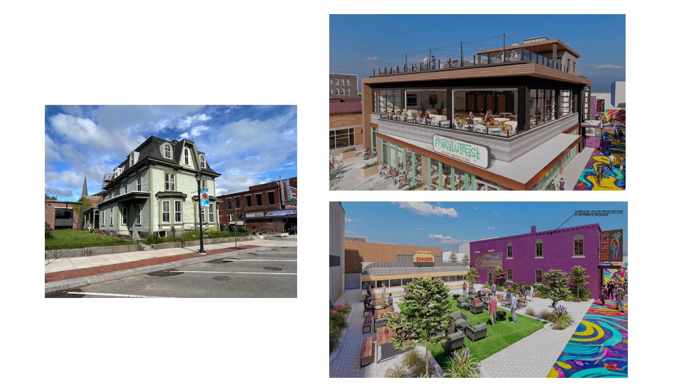Steve is desperate, if you have a piece of land, Steve will move that building for you. But that should be for the homeless, if nothing else. Find a lot, he'll move it. Again, I hope we don't all agree that it's 100% one way or the other.

Mark's remarkable building to re-energize Phoenix Hall. I mean, they're all nuanced.

So what do I think? I think that is kind of in the public trust. I really do. It's owned downtown Concord. I think individuals own pieces of it, but I think it comes with a responsibility. I mean, again, I think the owner has an outsized vote, but I think that

there is a public investment in the downtown, and I think it's different, and I think it requires more thinking through things more. What else do I think? I think that

if I had to editorialize, I hope that when we have these historical discussions, we don't just think about the brick and granite buildings. We are willing to think about buildings that we will recognize might be important in time. I mean, that was on the cover, the employment security building, on the cover of New Hampshire Architect. I don't think that exists anymore, right, Chris?

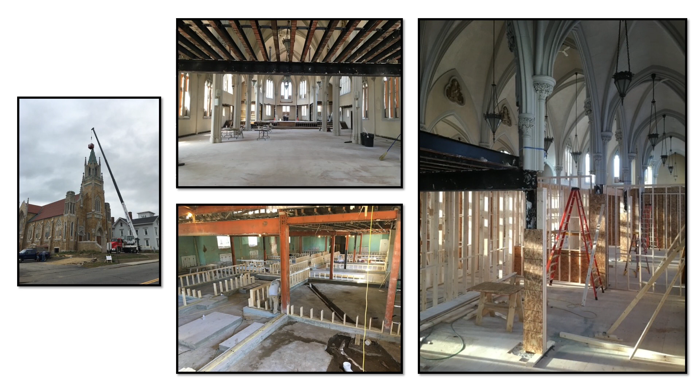But these things, as you turn the page to a new chapter, it's painful. That's the cross coming off the church. Certain elements are saved, a lot is lost.

But with a lot of investment, there is a new chapter. I'm always amazed how many people still think it's a church, which I take as the greatest compliment. There are 10 families that live there, and their friends and family members roll through and get to see these remarkable details. Hopefully it lasts more than 39 years, but this is just the next chapter.

John, in addition to doing every residential project I've been involved with, does a lot of other stuff. In Concord, probably the thing you know him best for is the Endicott furniture facade work, which is remarkable - my point about high quality, low quality, that's high quality. But if you're a Manchester person, John's done some remarkable stuff down there, including the Pandora Mill, now UNH Manchester. John designed the Foundry restaurant there, and this incredible space for DEKA and some of these biotech companies.

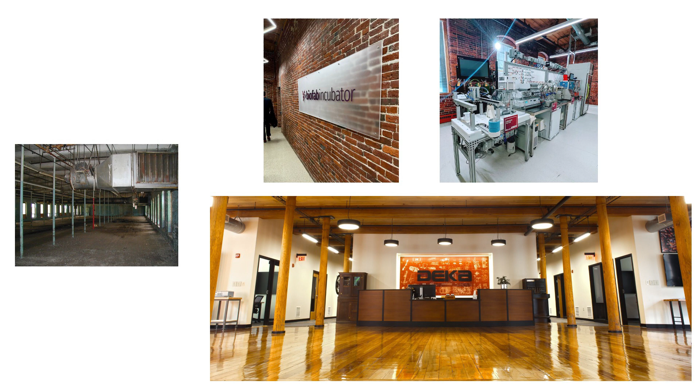What is that, the DOE? Yeah, it's an ARMI bio incubator space, so it's ARMI BioFab.

The gist of this stuff was to note that most of the work John just showed are all in mill buildings, all the old woolen mills, and they can house anything from restaurants to office buildings to clean rooms designing the future of bio manufacturing. People are down there inventing how to manufacture human organs. It's all in the shell of a building that's been there since the 1850s. It's interesting, it's challenging, but it definitely can be done. You can use old buildings for very new, cutting-edge things we haven't even thought of yet. So they're very interesting things to reuse.

So I guess we ought to talk about First Congregational Church a little bit. Thank you for permitting the digression.

So that bell tower is 1874. That little guy, sort of a smokestack, I think is also 1874. This middle thing is 1874. Everything in between is 1936.

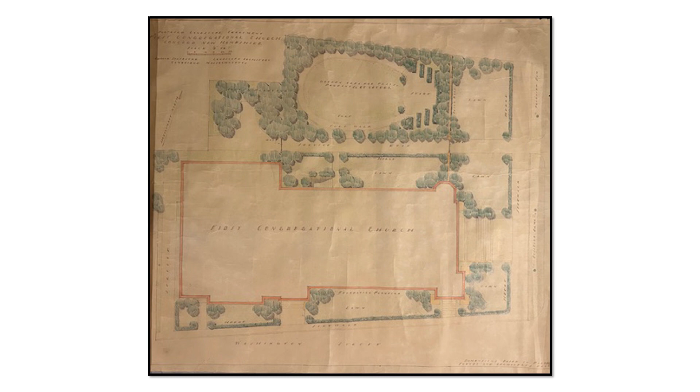But the pages keep turning. In 1967 they go back to the same architect, and he designs this Christian education wing for them. This is something we found, which is actually a plan. There was to be this gorgeous amphitheater in the north lawn with a stage and this sloping lawn, sort of like a Great Woods concept.

But something happened - not enough money, change of plans, whatever - but it was contemplated. And is that what you'd call the 6th meeting house? So First Congregational Church now shares Wesley United Methodist Church, right? Such are the times and the lack of... yeah. And that was Arland Dirlam's design - the elegance of the same architect, by coincidence, designed that building too.

So back to the building itself - there's an interesting middle chapter. The First Congregational Church starts the cold weather shelter in 2005 and runs it for a dozen years at least, before they notify the community that they really can't do it anymore. The Concord Coalition to End Homelessness sort of gets its arm twisted to step up and does a wonderful job, builds this other shelter - in the interim it's at St. Peter's, then there's a shelter constructed behind the Resource Center on North Main Street.

Let me back up half a sec - maybe 5 years before this, the writing was on the wall, I would say, for First Church. They had reached out to me actually and said, we're at the beginning of this thought process that with the 60 of us left, it's not that far off before we're going to need and want a smaller building. And they said, well, we're not there yet, but what do you think? And I looked at it, and we just sort of put the idea on the shelf.

Moving forward, one of the blessings of this project is that the plans exist. At Sacred Heart, there were stories of, we saw the plans a couple years ago but can't find them. You can measure any building and drill holes in ceilings to figure out how they're built, but having these plans was truly a godsend. There are a total of 8 sheets for the whole building. It's remarkable when you look at plan sets now that they could achieve it on 8 sheets.

So what do John and I do? We start doodling. And when you have the existing plans, you doodle on the old plans. And there are many iterations, right, John?

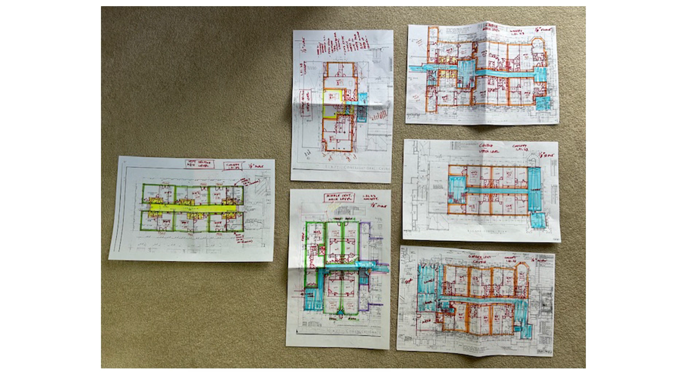I think Jonathan Halley did that, and it's a series of townhouses. Looks nothing like what we did. Then the guy, what's his name, the Pocket Neighborhood guy? Ross Chapin, the Seattle architect who wrote the book on Pocket Neighborhoods, that Steve Dupree brought here. He actually did a little plan for us. And John said, we can do better.

And we did. So my point being, sometimes it takes a while for things to really show themselves. For example, that is our 14-unit set of plans for Sacred Heart Church, which only has 10 units. So it takes a while.

Finally, we settled on the plans that we have for First Church, and I actually just went back and looked at those, those are the oldest plans I could find on the project. John, they're remarkably similar to where we wound up.

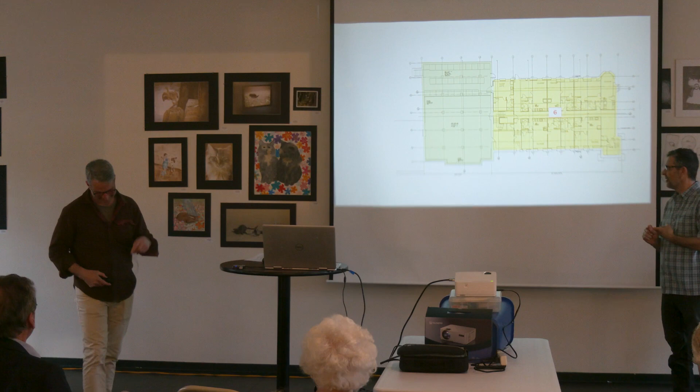I always say there's two criteria for doing projects, for me. One, oh sorry, what? I said beer. Well, that compensation is one. Yeah, have to like it, and it has to make money. I don't mean it in a, like, I'm a great lover of money way.

It's just, there's a lot of risk and time in these projects. There has to be some margin. Plus, they make these things called banks that lend you money, that really don't want to lend you money if you're not making anything.

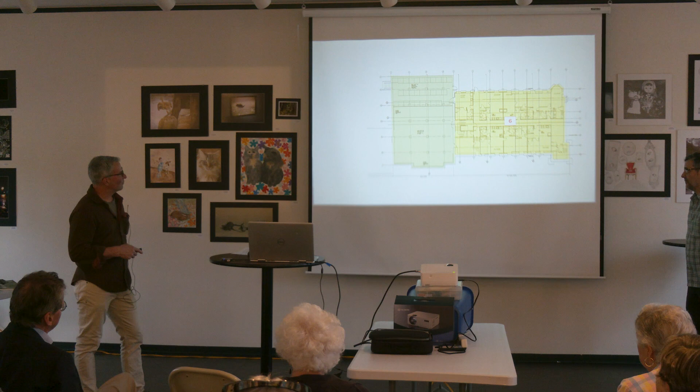That is the first floor, the basement. We never say that word, we only say garden level. If there's a genius to this project, and we really figured it out on Sacred Heart, it's that this is productive space. Like Sacred Heart, it's sort of a parish hall setup. There was a stage, a commercial kitchen. But if you go to the church, you think of the sanctuary as the first floor, and that's the basement.

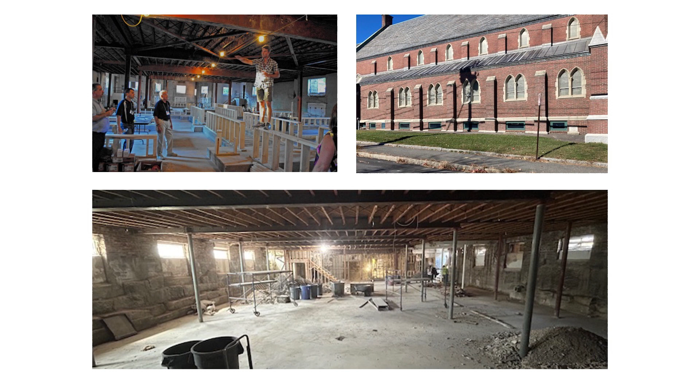That's me standing on these little knee walls at Sacred Heart. The windows are pretty big. If the ceilings are tall enough, you raise the floors, which lowers the windows. And that's what we did.

Here, similar sort of, this was taken at First Church today. We will similarly raise the floor. You can see these windows originally were about 4.5 feet tall. They're now 2 feet tall because they clearly just froze. They had little window wells, like these bathtub window wells that must have had little drains, and they must have frozen and the water leaked in, and they just said, that's it, block them in.

We are going to, as part of our site plan, create these large window wells, which will allow us to enlarge these windows, restoring them to their original opening size, and turn this into 6 units, without which there would be no project. I mean, there would be no project.

I would encourage other people to think of these spaces as having value. For example, there have been two units at Sacred Heart that have resold since I did the project. This one is on the garden level, and Redfin says that unit is now worth $679,000 - in the basement.

So my point is simply, challenge yourself on every assumption. We did not look at that basement garden level at Sacred Heart as being valuable space, and we came to that conclusion. Without that, there would have been no Sacred Heart, and there would be no First Church.

Then on the main level, six units in the church, and they have the arches and the nice windows and all that sort of stuff. The middle section is the sort of parish hall kind of section. And then, if you're going to do a basement, you might as well also do the Sunday school wing.

The original plans that one affordable housing developer had was, you should knock that down. It doesn't fit. Well, it's expensive to build new buildings. It really is. We're in Concord, New Hampshire - we're not in Berlin, but we're not in Hanover. We're at this certain price point where you have to be nimble, and that thing exists.

I would say without those six units, there's no project. So anyone's going to say, oh, the church, yeah, great, fine. But you have to hunt for the nooks and crannies. The math has to work.

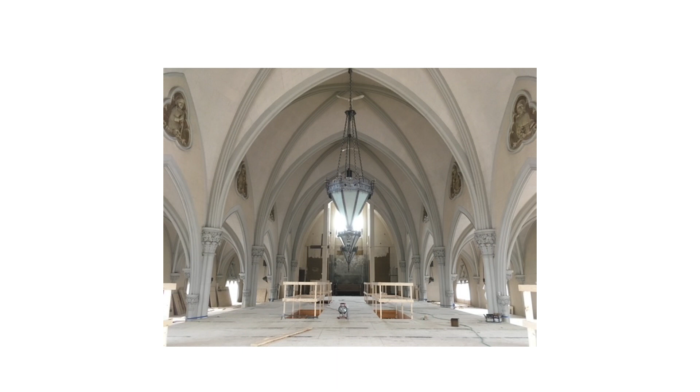Then you get to the upper level, and this is sort of an existing floor, and you have this sanctuary, and nobody really wants 45-foot tall ceilings, so you slice it with a floor, like we did at Sacred Heart. In the case of Sacred Heart, it brings you into immediate contact with these incredible elements. That's less so true at First Church, but it's still pretty neat. I can't wait to see that floor - I bet we'll have State House views out of those windows on the upper level that we don't have now.

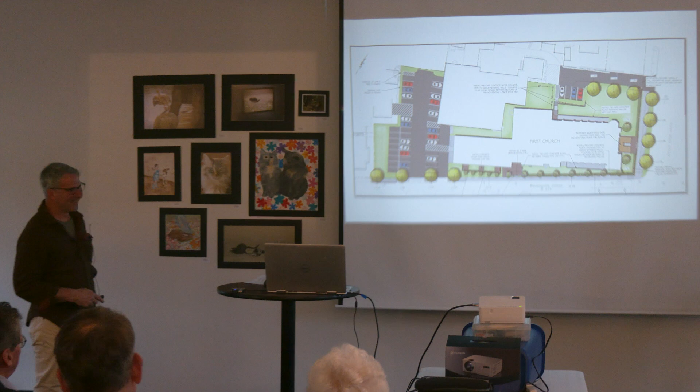So we do all that, and thankfully, First Church has a good hunk of land around it with this really - too much parking, don't you think, Chris? Oh, too much. And too many trees, and it's horrible. This is a jungle.

And, you know, I showed you those pictures. I like sort of the juxtaposition of the old and the new. It's basically going to look like a church. We take out the stained glass windows, which - think about it, stained glass looks great from the inside. It really doesn't look very attractive from the outside, especially when it's covered with sort of browning plastic panels. So the windows really do punch it up.

Drive by Sacred Heart sometime - we played around with different ideas, black and all these sort of contrasting colors. In the end, we came to the conclusion at Sacred Heart, and we followed it here, which is let the building kind of do more of the talking. So we essentially matched this precast color in the, more modern quote storefront windows. And then this is sort of the one little playful thing, go in a modern direction.

Show that there is a new chapter. We've turned the page on this thing a little bit. And I bet half the people here, if not all of you, hate the glass panels. You know, I like them. I don't know, I think the Architectural Design Review Committee was conflicted on that one.

But I don't like the planter. You don't like - they did make us put the planter in. And when you turn the page, you can do other things that you've always wanted to do, like flood the thing with solar. It's wonderful.

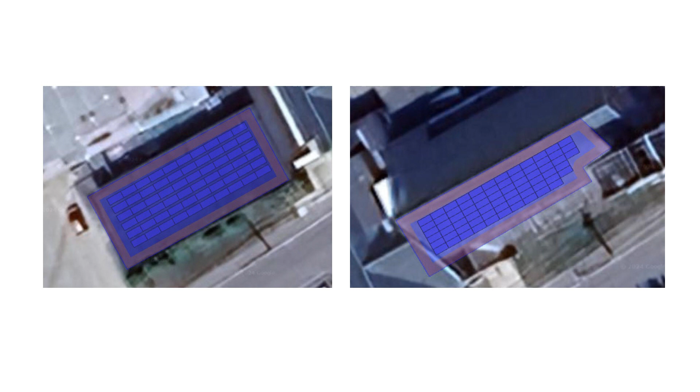Personally, I've wanted to do significant solar components for a while, but been distracted by other things, and it's just hard. I do think there is - it's 2024, I mean, I think there is at least a moral obligation to consider how buildings can be built nowadays to be as planet-friendly as possible. And when you have a big hunk of flat roof with zero obstruction and a big 12-pitch south-facing roof, there better be a good reason why you don't do that.

So what we're actually going to be able to do, I think, is have all the house service and about 6 to 8 of the units be truly net zero.

So there's a few steps in between.

We saw Chris 4 times. We went to Architectural Design Review 3 times, Planning Board twice, City Council for a 79-E twice, and a new one for me is our neighbor, as is well reported, challenged our zoning permits, really sued you more than me, right? Sued the city of Concord, saying that Chris got it all wrong. Yep, and we've been able to resolve that.

And after you go through that, it takes some time, and you're not sure how it turns out. And then what happens in the meantime?

Well, the 5-year treasury does that. And when you borrow money for commercial projects, you don't care what the 30-year mortgage rate is, you don't care what the overnight federal funds rate is, you care about the 5-year rate. Really, you care about the 5-year Federal Home Loan Bank of Boston rate, but it's very closely tied to the 5-year treasury.

It just follows this rate. That's what it was at when we first kicked the tires, and that's what it's at now. If we were pricing our loan at that, there would be no First Church project. But thankfully, Franklin Savings Bank said they wanted to do it when we talked to them. Their original loan commitment ended, and they've extended it to July 1st. Without a New Hampshire community bank being willing to do that, there's no project.

One of the things we are really lucky about in New Hampshire is that our community banks are healthy, have a lot of lending capacity, and they're mutuals. They truly care about it—there's no stockholder asking them to juice the returns. They exist for our benefit. Merrimack County is great like that. Franklin Savings Bank's been great like that.

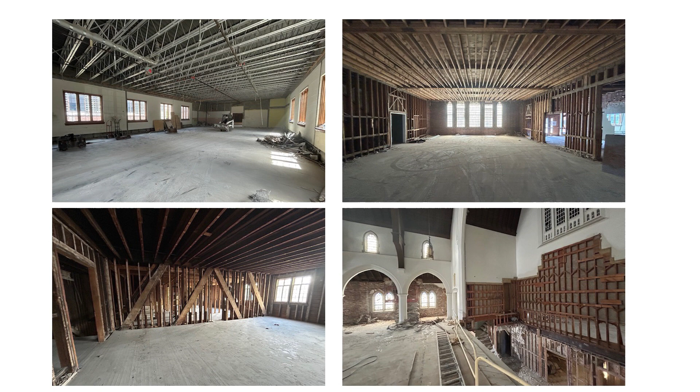The middle section is the most bizarre thing ever. This is this enormous timber compression truss with these big diagonals and tension rods. And this was a flat roof—now the whole thing has a pitched roof, but that was a flat roof. So these things were carrying this tremendous roof load.

And then this is the altar area. We've removed the altar because it's 2024—some people have mobility problems. So to go up 2 steps and then back down on the other side of the hallway would mean certain larger sections of the building would be inaccessible. So we removed that to build a new floor without the change in elevation.

Hopefully there's a whole bunch more slides and a nice one with a ribbon cutting in a year.

But, yes? I assume there was an organ somewhere in there. What happened to the organ? Yeah, there's an organ up in there.

What happened? Someone stole pipes. Well, it's like an encyclopedia set—don't take one.

The organ at Sacred Heart was essentially sold for $1. There was a company that came in, and it's a lot of work to take it apart, label every pipe—these guys are sitting there making custom cabinets and labeling things and diagrams. It's a lot of work. That organ was intact. As part of the departure of First Church, some of the pipes started disappearing, and once that happens, it's an encyclopedia set.

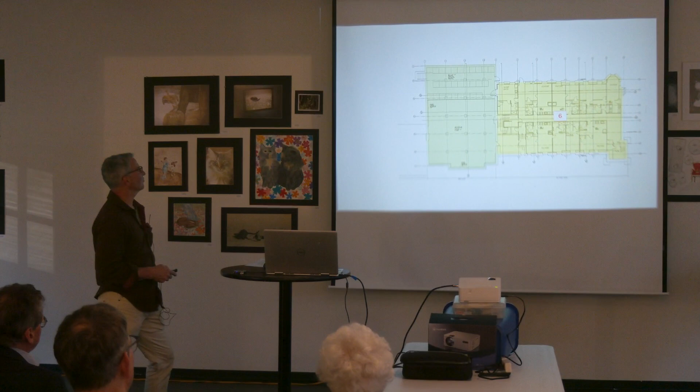So sure, I will show you a 1-bedroom typical. So here's the garden level. This is a 1-bedroom unit right here. Garden level is ground floor? Basement. Okay, can't say that.

So it's about 500, I think it's about 545 square feet. You walk in a door, you have about an 11-foot run of kitchen with a fridge that has walls on either side so you don't see it from the dining/living space. You have a bath close to the hallway - we try to stack all the plumbing close to the corridors. In you come, and you have a bedroom, 120 square foot bedroom with 5 feet of closet. That's a pretty typical unit.

You said 120 square foot bedroom? About 120 square, 10 by 12. 10 by 12, ooh, my, okay. My view is, so what do you want in your bedroom? Queen bed, 2 nightstands, a dresser, a way to enter, and a closet. That can be achieved - you can do it in 200, 300 square feet. It can be done really in 120 feet, as long as the door's in the right place. I'm a big believer in...

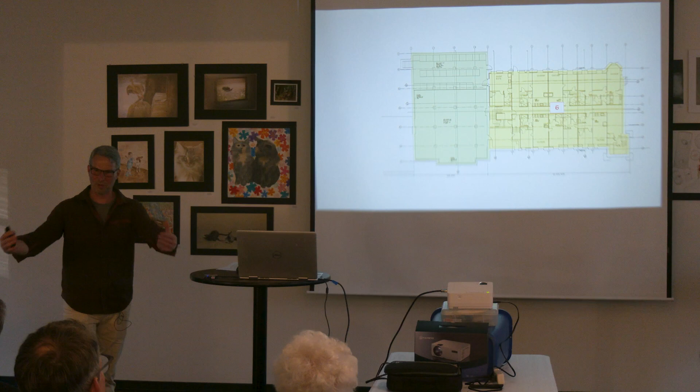I always say to John, we have to - they're small units, you're not going to have zillions of furnishing patterns, but there has to be a place where you can put a dining room table. There has to be a place - I don't think you should have a TV in the living room, but I understand a lot of people think otherwise. There has to be a couch location and a TV opposite, that's what people want. As long as those things work, and there are certain distances that make sense - below which, not good, above which, would you like an extra 50 square feet in the bedroom for a chaise lounge or your treadmill or whatever? Fine, but you also have to pay me for it, I have to pay to build it.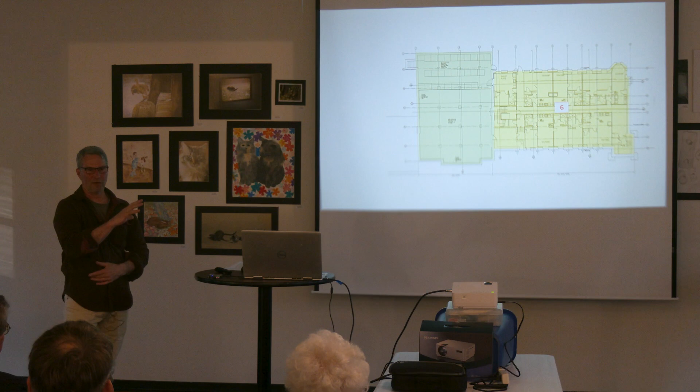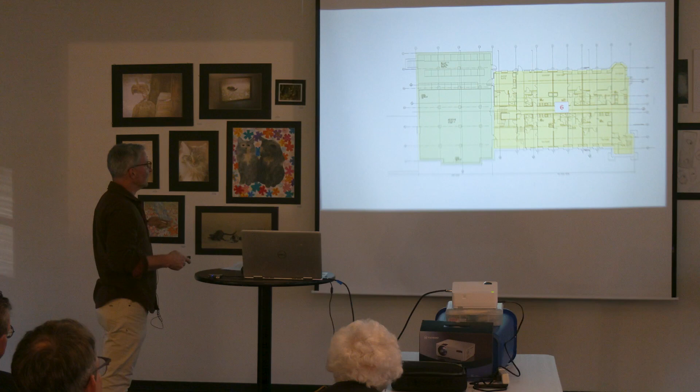So the theory of this is the units are on the smaller side, but you can fit all that in - it's not like you have to climb over your partner into the bed, there are certain minimums. There also are a number of lounges throughout the space. The building just sort of presents itself that way - the choir loft is a lounge. So let me point out, here's a lounge on the garden level. You mean like a common area? Yeah, sort of - you're on a Zoom call or something and your partner's there, or you just want a change of pace while working at home, or you want to hang out with some friends. There you go. This whole front patio that I showed you, I think is really one of the gems of it, as well as the whole lawn, and there are some lower patios.

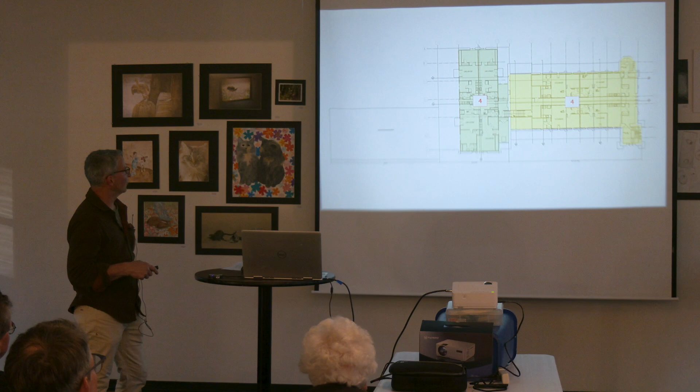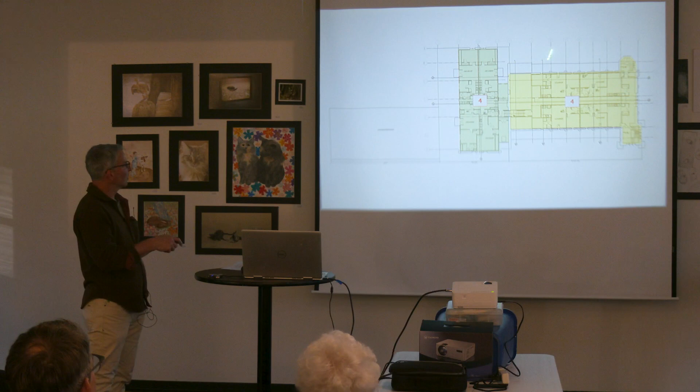This is a patio and entrance on Washington Street. There's sort of a lounge in here - so lounge, outdoor patio, lounge, and then upstairs these mini lounges in the choir loft area, a lounge up here. So there's a lot of little places that people can... Does the square footage increase as you go up a floor? No, it decreases because... sorry.

See the outside wall there? It steps in at this column line. So the footprint of the church is about 5,000 square feet, but it's 3,000 by the time you do that. It creates some interesting geometry.

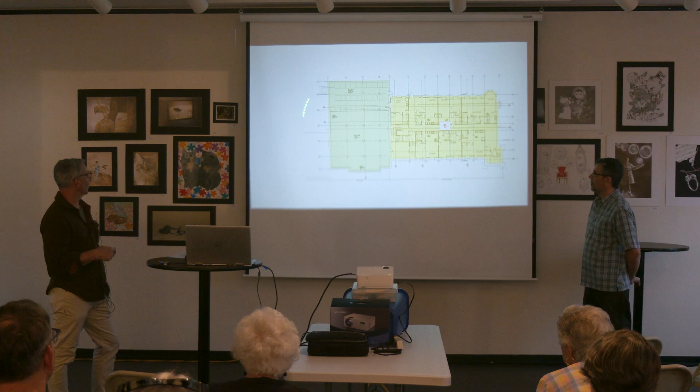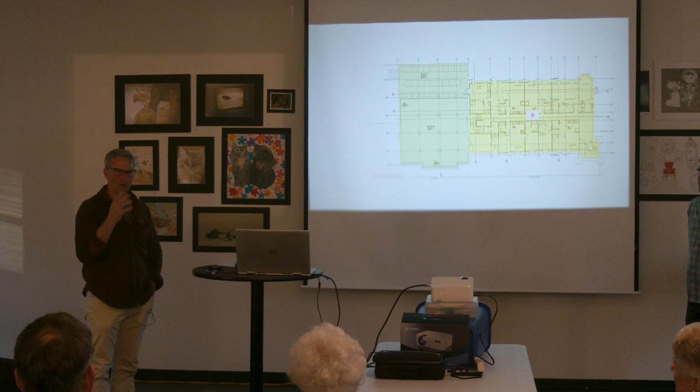So is there any storage area for people? Where are they going to put their Christmas decorations? Oh, I'm glad you asked. This is a basement area now, and these are like 6 by 6, maybe even bigger. Storage area. So everyone has a storage area for their bikes and whatnot, and there'll be some large areas designated for kayaks and longer things like that. So people have their vacuum cleaner closets and all that in their units, but they also get this other space for a few bigger things.

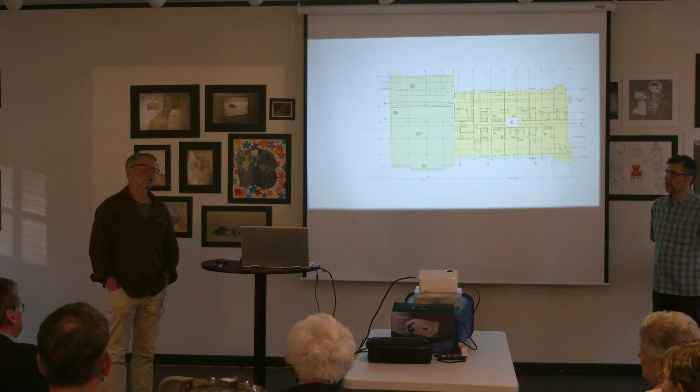Has the chapel been destroyed already? Largely, yes. Although, I saved so much stuff from Sacred Heart and moved it. I literally was the owner of 20 pews at one time. And then you realize this is just absurd. I would offer them to people, and I was down to 18. I have 2 stained glass windows left from Sacred Heart, and that's it.

I saved these stained glass windows. I agonized. I took all the altar paneling myself off of Sacred Heart. I ended up getting a little fragment of a nail in my eye, had to go to the emergency room. I saved it all, moved it 3 or 4 times.

Long story short, the way demo contracts work is you declare what you're taking and you have to take it, and then they have the salvage rights. So the demo contract on this is literally $235,000 to take everything out and dispose of it, including probably $20,000 of asbestos. They own the salvage rights, so all the metals get salvaged. This company, these guys are smart. All the masonry, there's some masonry walls, they crush it and sell it for fill. They bring in, there were 4 or 5 architectural salvage firms that were there on day one, and they walked them around and cut their different deals. So a lot of this stuff will see another iteration somewhere. I just don't know where.

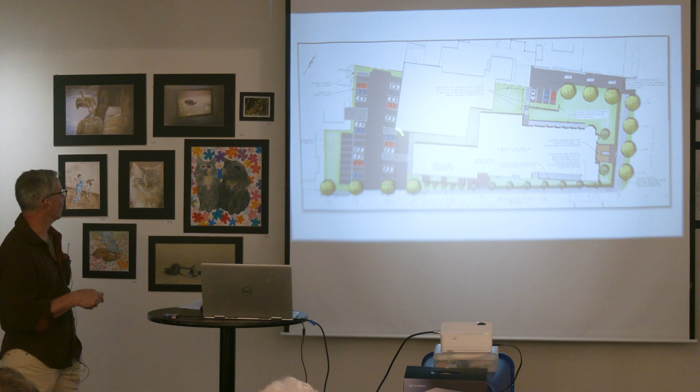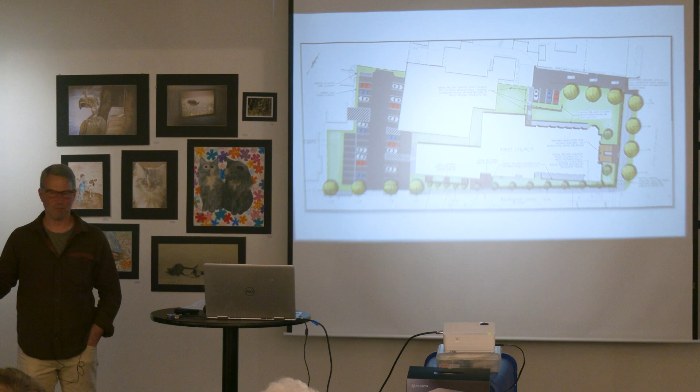We have 42 parking spaces for 30 units and 40 bedrooms. So we basically assign one permit per bedroom. If you get a one-bedroom apartment, you get a parking permit, not a space, a permit. I'll tell you, as the owner, ask the city of Concord how it works when you build a 500 space garage and lease out 500 individual spaces. You've leased every space, yet you walk in at 2 in the afternoon and it's half empty. You can oversubscribe these things.

And we will, modestly. Let's take just 2 more questions, give them a break.

So in the non-net zero units, the heat is electric? It's a heat pump. Does a heat pump use fuel oil?

Nope. You know the term mini split? It's essentially, you are extracting heat from outside, it's like a reversible system. Without getting too far into the mechanical engineering side, if you ever put your hand on top of your air conditioning condenser in the summertime, it's super hot. It's exhausting heat to the outside. A heat pump is really just reversing it.

You are extracting heat from the outside, and exhausting it. It's like you're refrigerating the outside. You say, well, how can that work when it's 0? Well, it's not 0, it's 270 degrees Kelvin. If you're at 0 Kelvin, then everything stops jiggling. But it's 270 degrees, so there's a ton of heat in the air, even when it's cold to us.

The reason I asked is then what do you do about the fuel tanks that are underground? Hope they didn't leak, pump them out, and remove them.